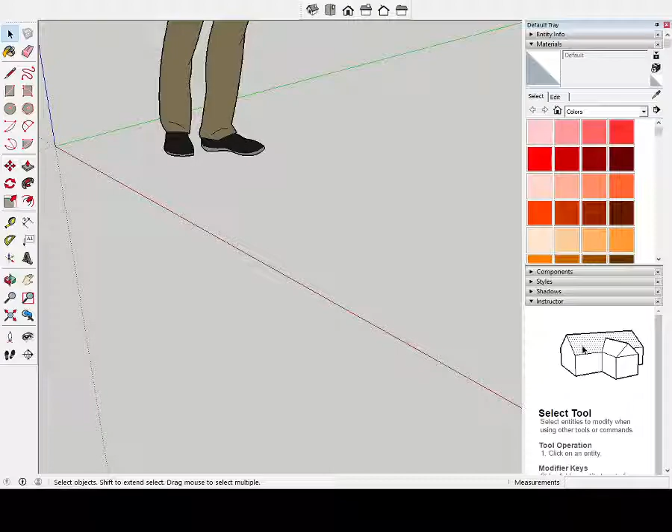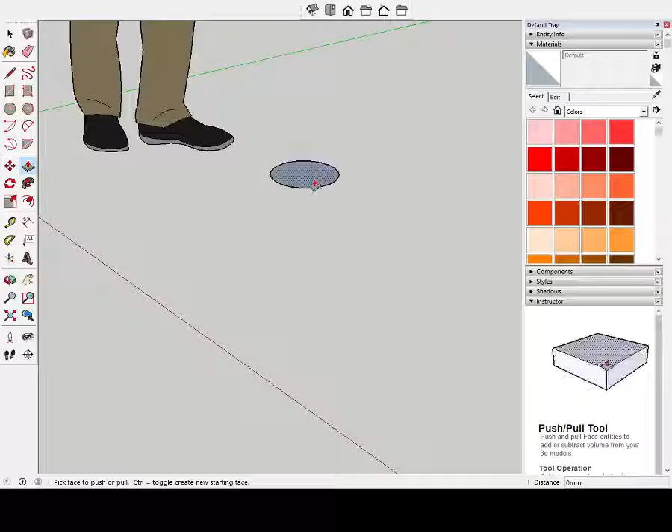What I'm going to do is straight away begin. I'm going to draw out the base, which is going to be 170 diameter, so I'll make this a radius of 85. Then I'm going to bring it up with the push-pull by 30.

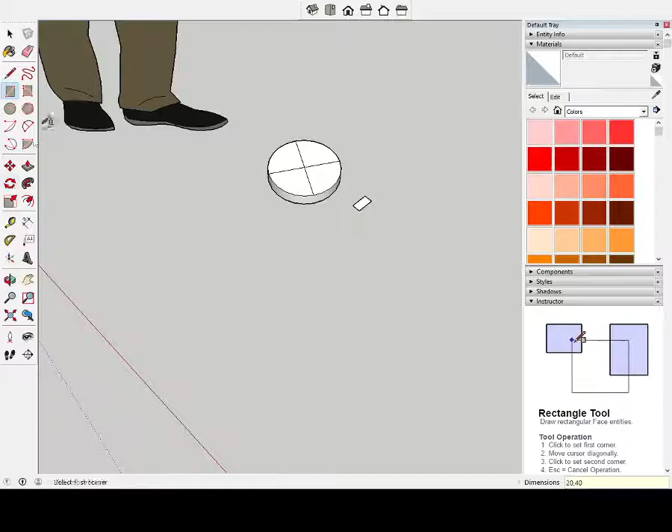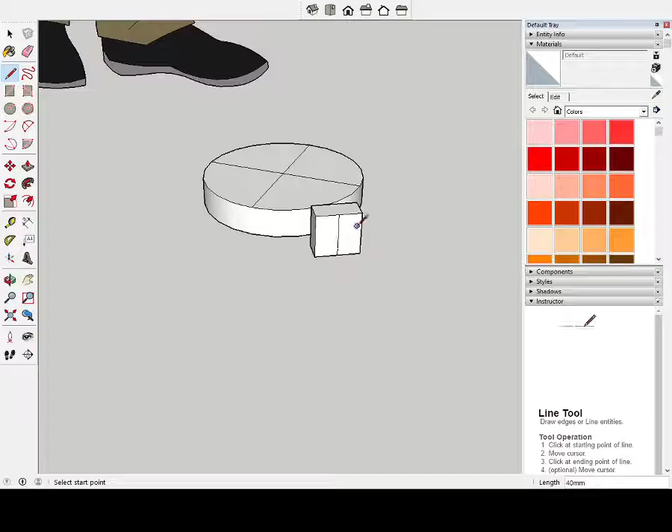What I'm going to do is look at this from above and draw a line across to find a center. Now I'm going to draw out a little pivot point, which I'll make 20 by 40, and push-pull this up to the same amount, so I'll push-pull it up by 40. What I'm going to do with this now is put a hole in it, find a center, divide it up center by center, and put a little hole in.

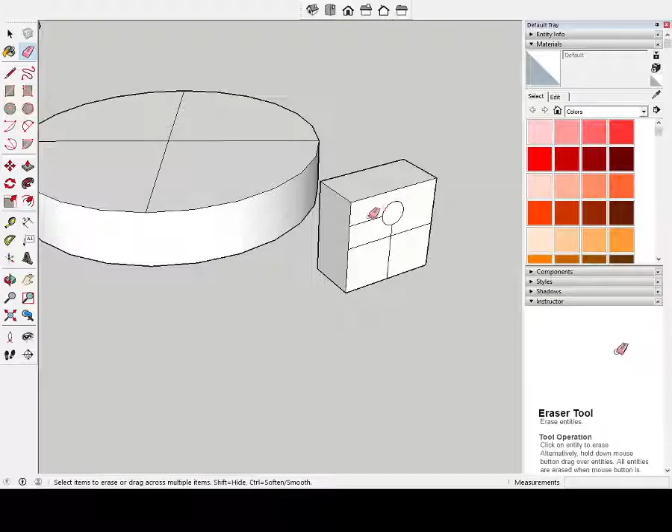The hole is going to be a radius of 5. I'm just going to rub these bits away. Now you can add curved edges to this, but I'm just going to keep everything square and simple. Push-pull this away.

Right, great. I'm going to be using this in a variety of ways. The first thing I'm going to do is use the move and control to duplicate. Undo. Select the whole thing before I do that.

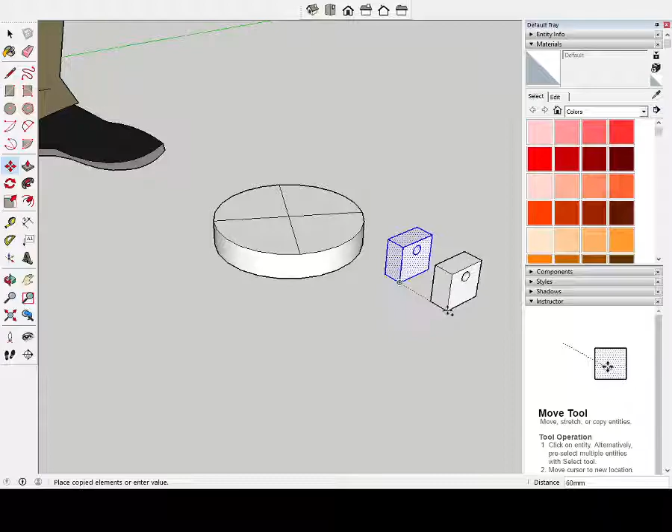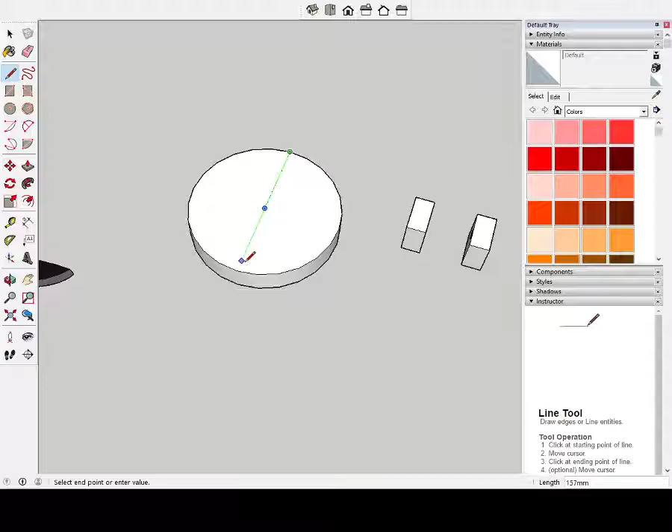I'm going to keep a copy there, this one, and just place it up here. What I want to do is place this on the circle. I think I'll just do my lines again. There we go, that's a bit better. Select one of these, place it above.

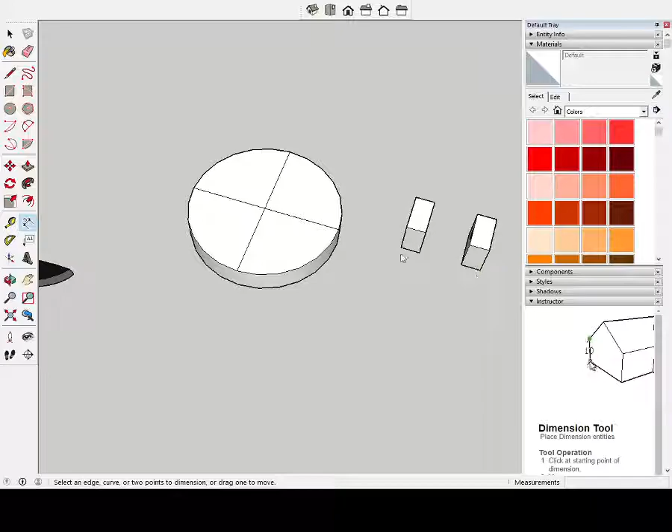Now what I'm going to do is put it exactly on. If I remember correctly, this was 20. So I'm going to do a little offset on this inner line here of 10. That should give me a guideline to stick this to. So I'm going to take the whole thing and pull it over to here and move it along a bit.

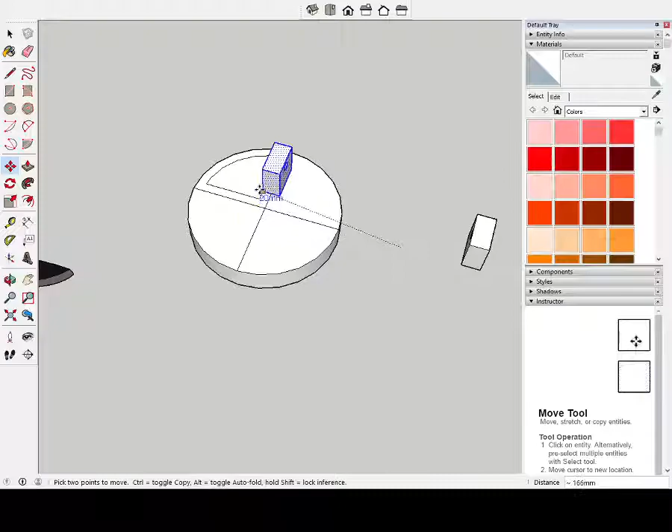Actually, if I want to be really precise, I can draw along here 20. That's what I'm doing. There's my endpoint, and I'm just going to draw a line across. It'll rub out all of these other lines—I don't need any of these. This is just to help me place this into the correct place.

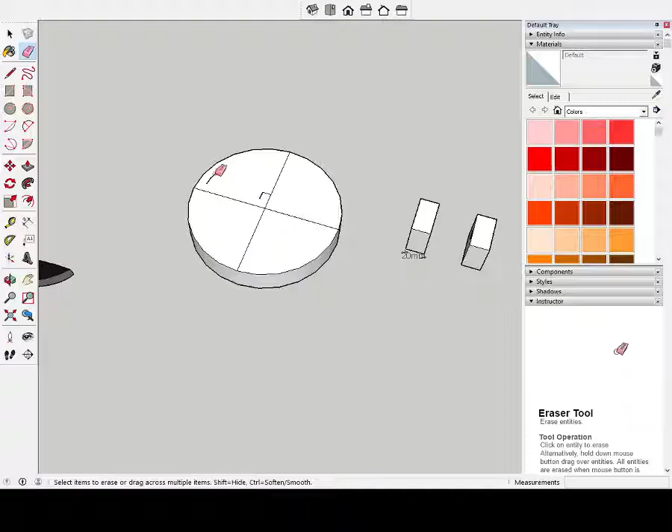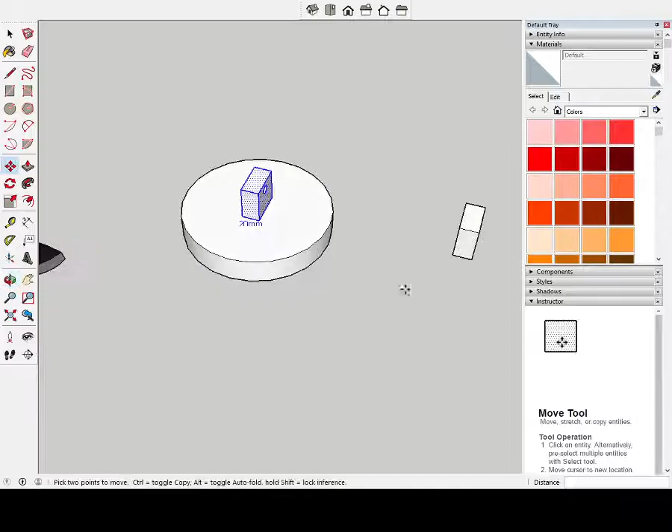So that's centering it basically. I've used the offset and then a measured line. I'm going to grab it from this corner because that's the corner I wanted to go into. I'm going to turn this around a bit. There we go, so that's now centered. I can rub out my measurement, just deselecting bits I don't need anymore. Select the measurement—that's kind of hidden in the block, so I'm just going to leave that there.

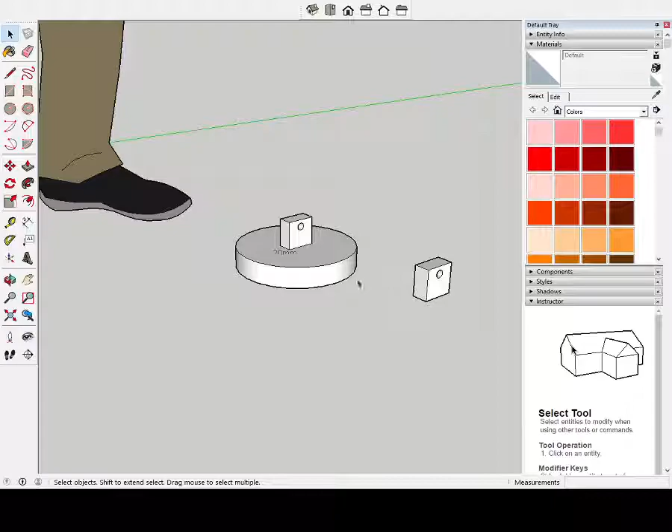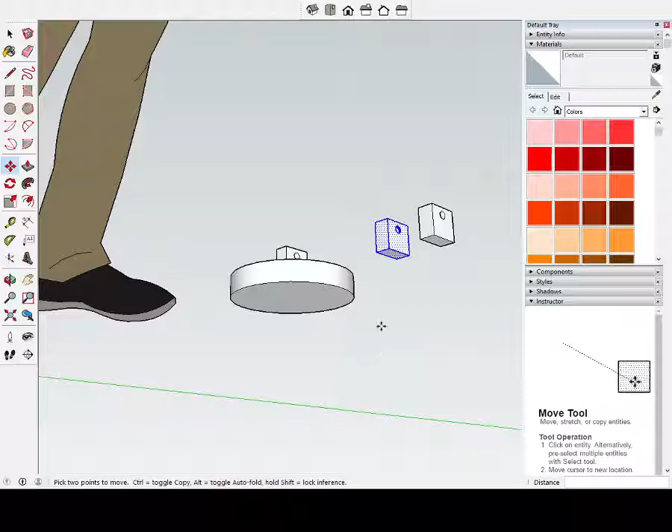Okay, so this is my base. What I'm going to do next is copy this again by moving it, using the control, and I'm selecting the entire block when I do this. What I'm going to do next is make this, looking at my measurements, just 400. So I'm going to add on—this is actually a height, I believe, of 40. Just double check that by putting a measurement on.

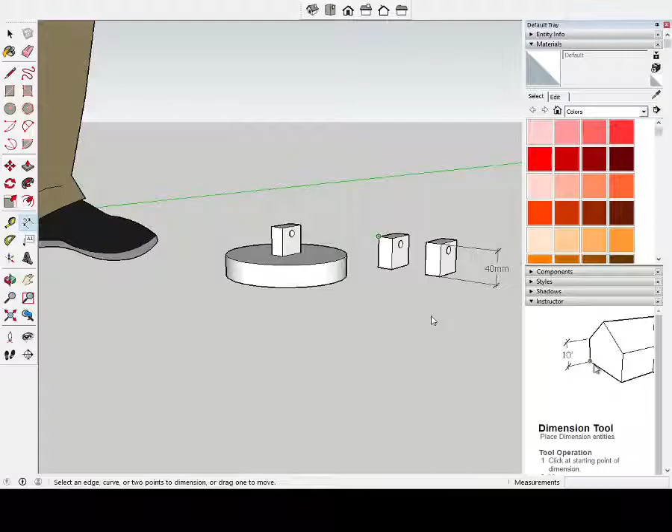Yeah, so I'm going to make this—I'm going to add on an extra, what I'm going to do first is add on an extra 320, and then add on a block at the bottom, and duplicate this. So what I'm going to do is push-pull this below the work plane, and push-pull it down 320.

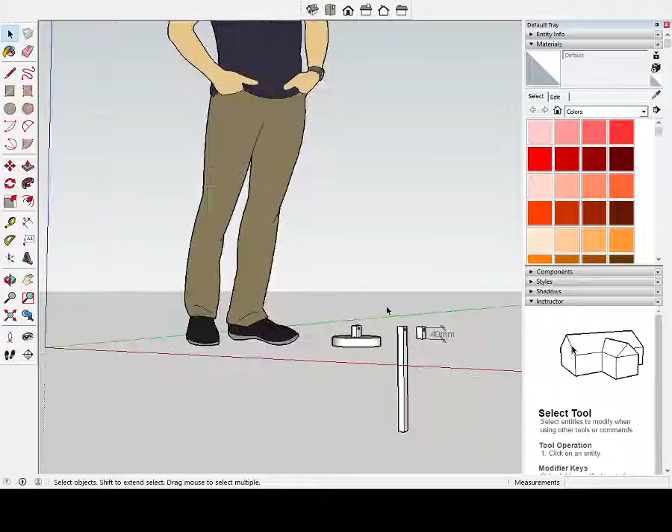Great. And then what I'm going to do is just grab the whole thing and bring it up to the normal work plane, because I'm now below the work plane, underwater so to speak. Use this tool, bring it up. That's fine, doesn't matter if it's floating in the air a bit.

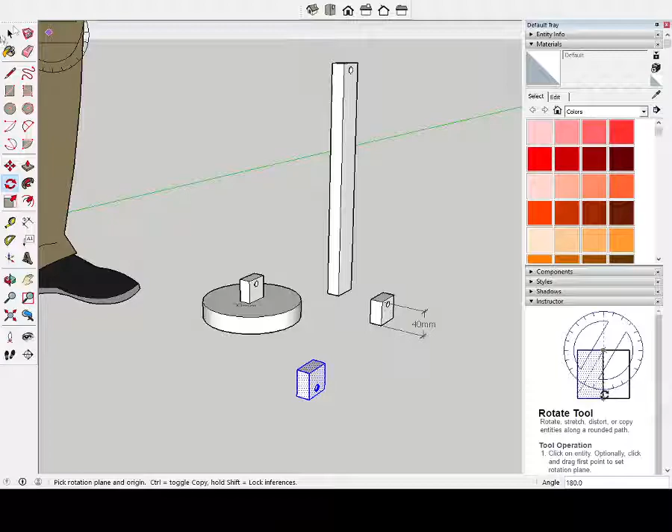Then what I'm going to do is take this again, I'm going to move it, using Control Shift to duplicate it. What I'm going to do with this other block now is rotate this using the red, I'm going to rotate that 180.

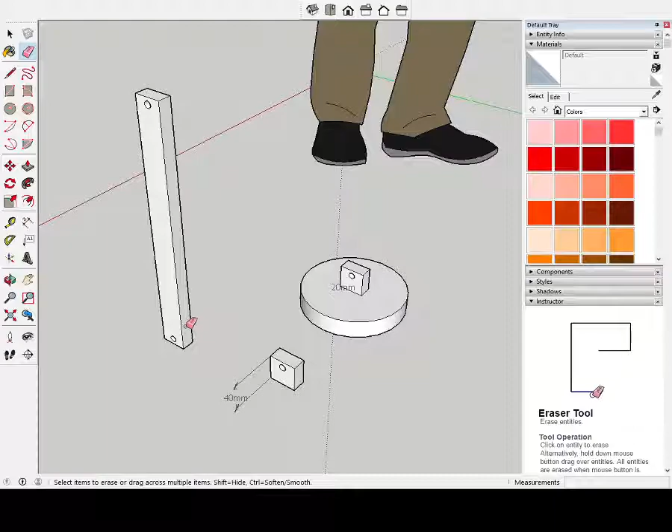And then what I'm going to do is select this and join it together with this, like that. Now I could do a variety of things. What I think I'll try doing here is just getting rid of that join line, and let's see what happens. Yes, that's now one piece. So that's going to be my arm, or the first part of my arm, and I'm just going to make this into a component by right clicking on it, and that's okay.

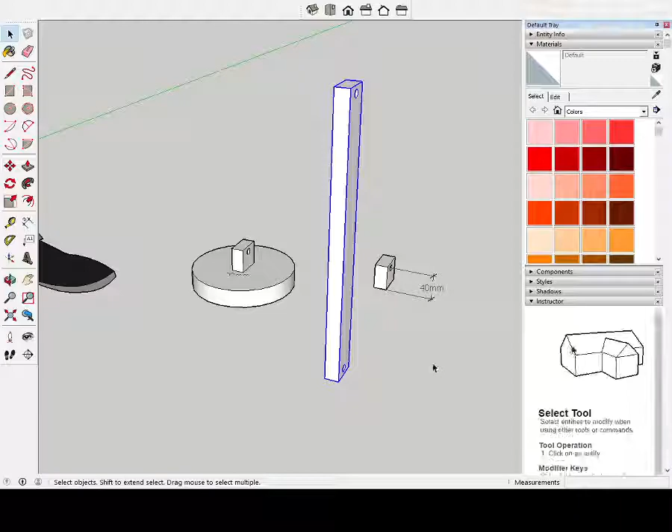So what I'm going to do is now place this hole over hole, if that makes sense, so it sort of matches up. I'm going to move this using this hole here and just join it to that one there. Maybe it's easier actually if I try doing this from the other side. Alright, let's have a look. Okay.

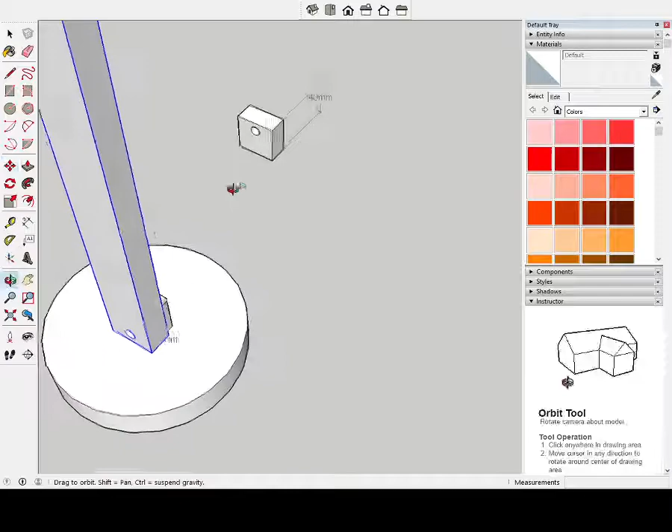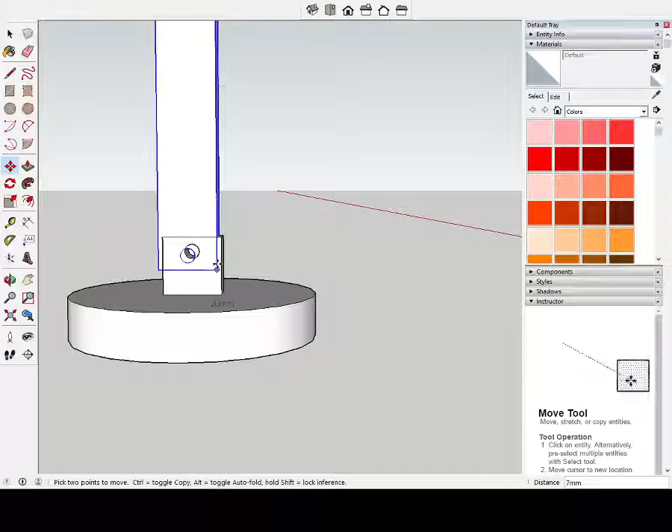Right, let's have a look. You can kind of just about join it up. I think possibly there's a better way of doing this, but I'm just going to do it quickly like this. There we go, that's actually matched up. Okay, that's fine.

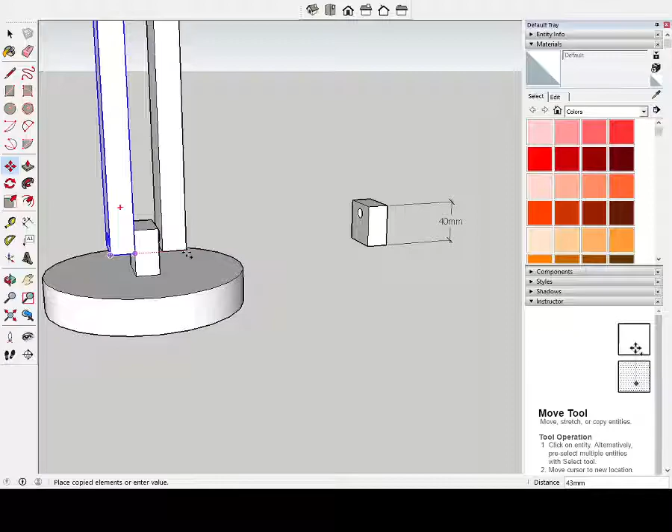What I'm going to do now with the component is draw it directly that way. Since this is a component, I'm going to press Control and duplicate it to the other side. And so long as I stay on that red line, I should be okay. That's pretty much edge to edge.

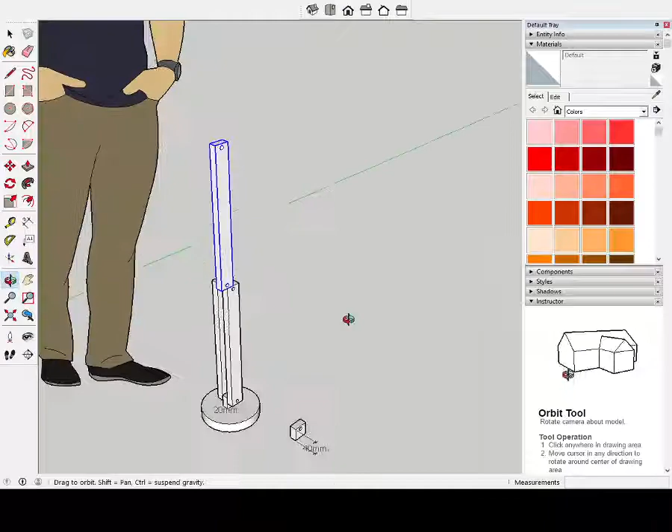So that's my arms. Now, using the Shift and Rollerball button, I'm going to duplicate this again using Control, and place that in the middle of these two. So it's a bit of maneuvering around - you might undo that, I duplicated it by mistake.

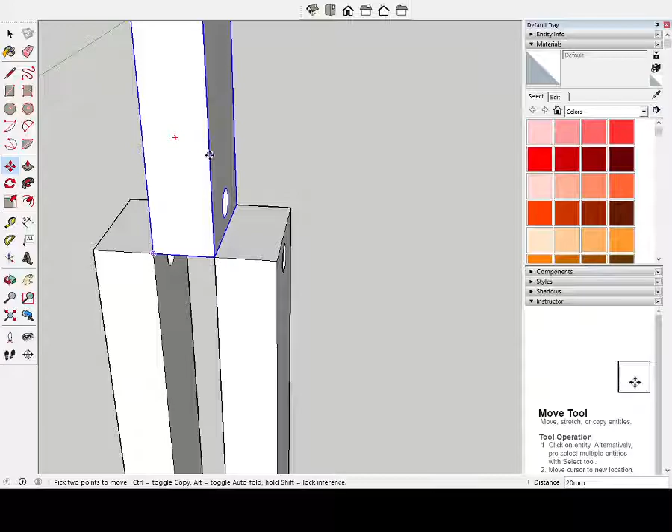It's a bit of moving around. You might want to set up a few lines as guidelines to connect things. I'm actually just going to use the axis as a way of drawing things down. So let's see if we look through - I need to draw this up a little bit more. Yeah, perfect.

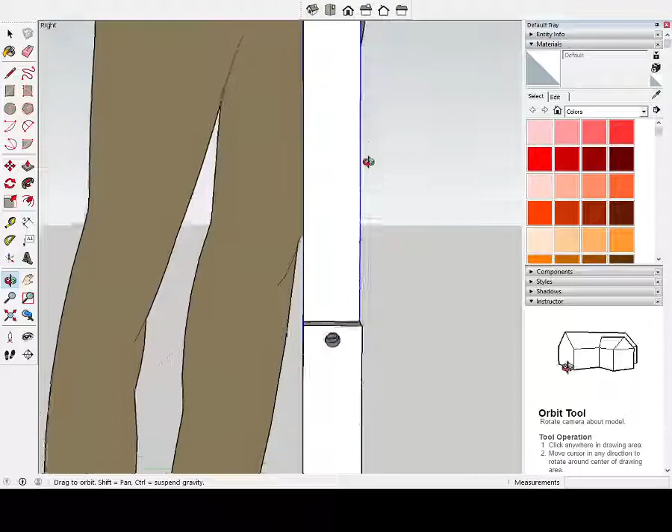Alright, what you can do afterwards, since this is just standing straight up, you can take this and rotate it. I'm going to actually rotate this - hopefully this works - along the red axis, and rotate it this way. Yeah, we're coming out of that, that's okay, we'll work that back in again.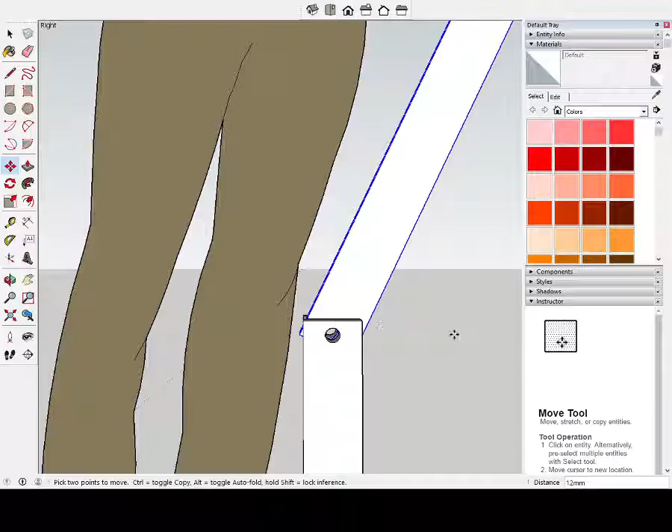Select it, move it back down a bit, move it down and across, just match up again. Alright, that's fine, so we've got most of these parts. This piece I'm going to use one more time.

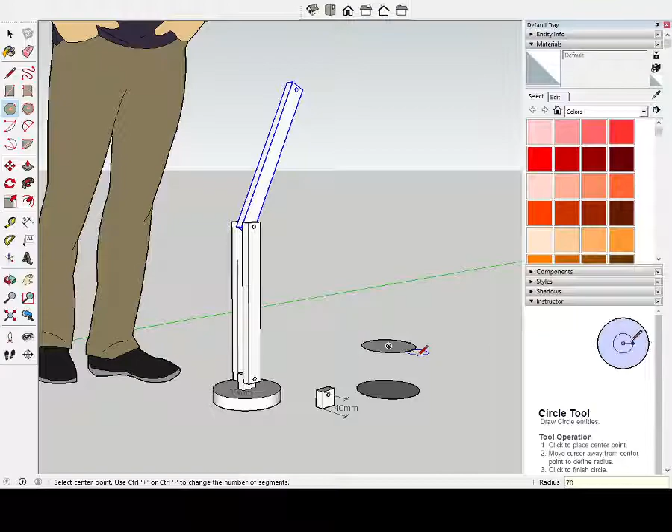What I'm going to do first is create a very simple lampshade, with a radius of - let me see what my measurements are. I've got some basic measurements. Once again, I think that measurement was 85, so I'll make it 70 actually. 70 radius - oh, undo, hit the wrong button there, folks.

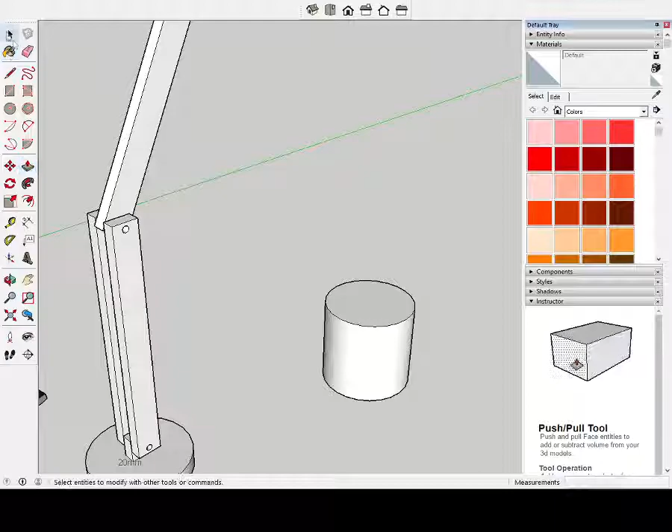Okay, that's fine, just get rid of this other one. What I'm going to do is push pull this up. What's the height of it? It's about 140 again, so I'll do 140. Then I'm going to grab the whole shape and use the scale, and just push it across.

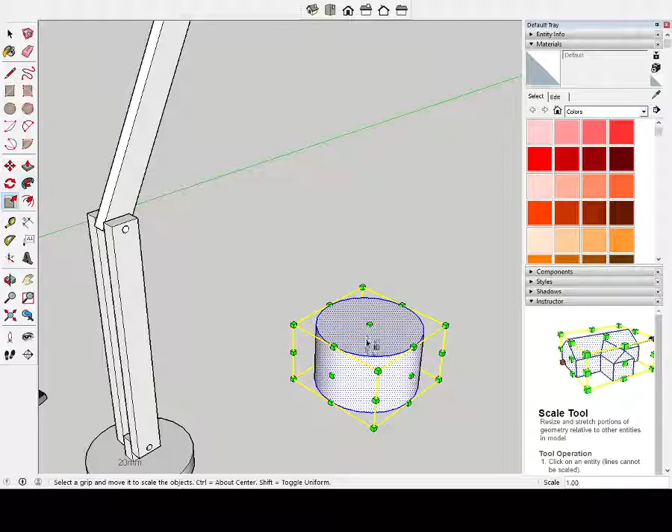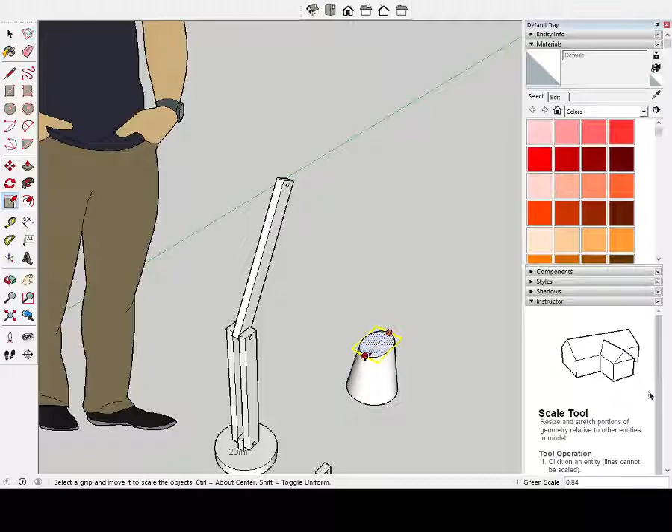Just trying to taper it actually. Let's just take the top bit and see if we can scale that. Good, yeah, that's what I wanted to do. You can do this by exact amounts - I'm not going to bother, I'm just doing this for the purposes of illustration.

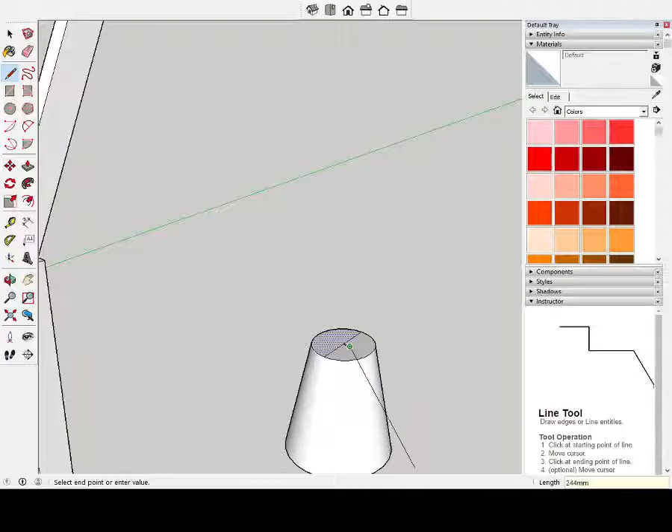Once again, just to center this to the top, I'm going to draw a couple of guidelines. I'm going to go out from the center at 10, and use that as a guideline there. And I'm going to put my little pivot point on top. I'll just make that a component so it's easier to move around. Create - okay, so let's move that up.

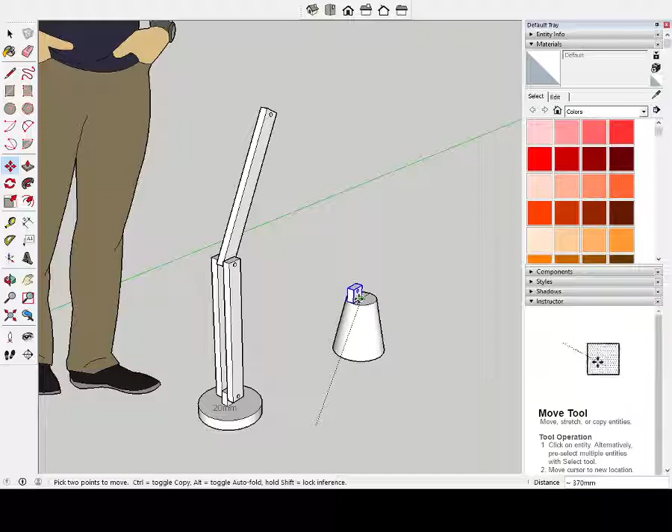When you make things components as well, what happens is they don't actually distort the object you're placing them on top of. There we go, so that's fine. This is very basic, just to get you started - make the whole thing a component. Create. Good, alright, now let's move this into place.

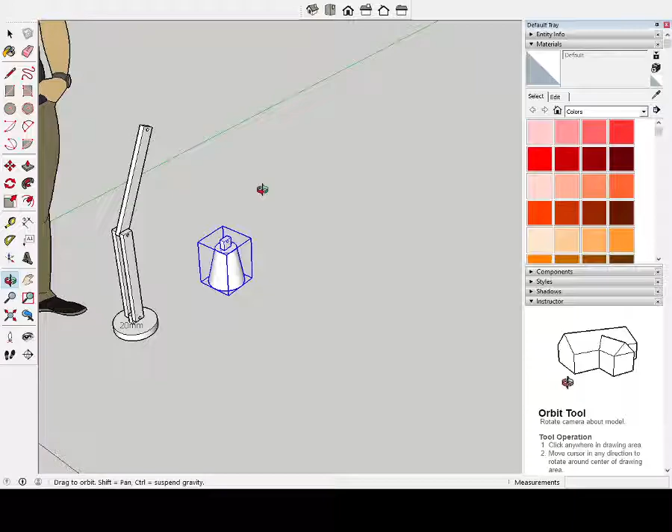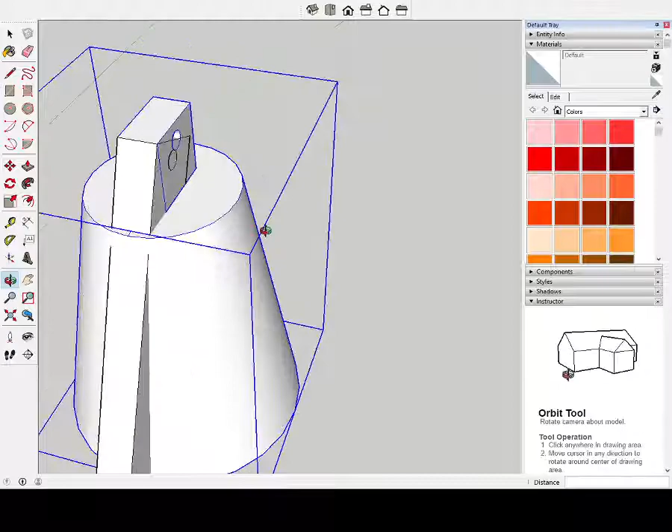Okay, now the top bit - there's a bit of a problem here because the top bit's only got one piece, but that's okay, we could just imagine there's a screw going through from the side. So I'm just going to move this up from there to there roughly, and we'll move it across. Alright, good, we'll just get those holes to match up, so we just need to look at it from the right direction.

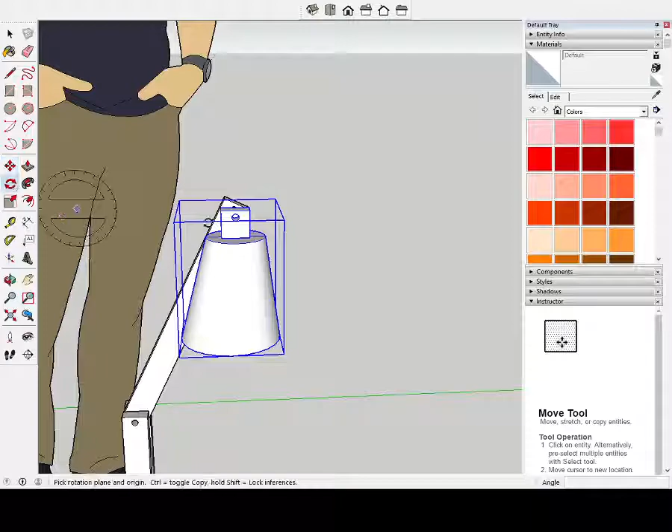Right, okay, I'm going to rotate this as well. I'm going to have to rotate on a flat side - I'm going to use that side and rotate it. Okay, just so that there's enough space between the actual arm and that point.

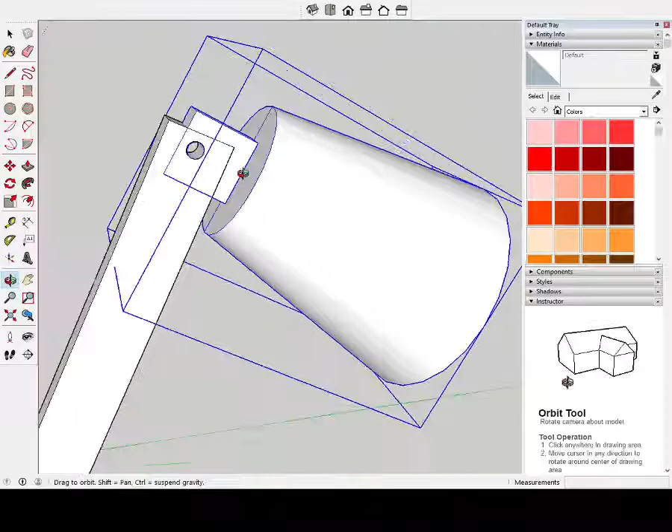And that - I could put in cylinder-shaped bolts to show that this is bolted in and to hold things in position. But I just wanted to very quickly show you how to do an Anglepoise lamp.

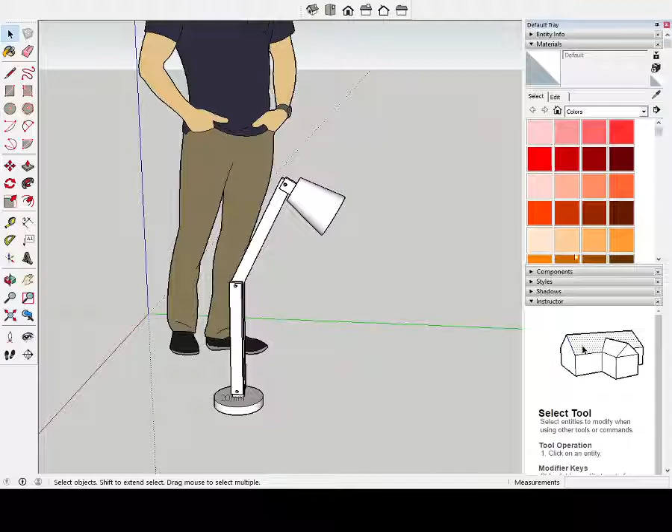You can add also textures and colors - I'm going to do that. I'm going to add wood for the base just to make it look pretty. I'm going to add metal for the arms. Yeah, okay, and also what I'm going to do lastly is just add a bit of color for the lamp, maybe a nice yellow.

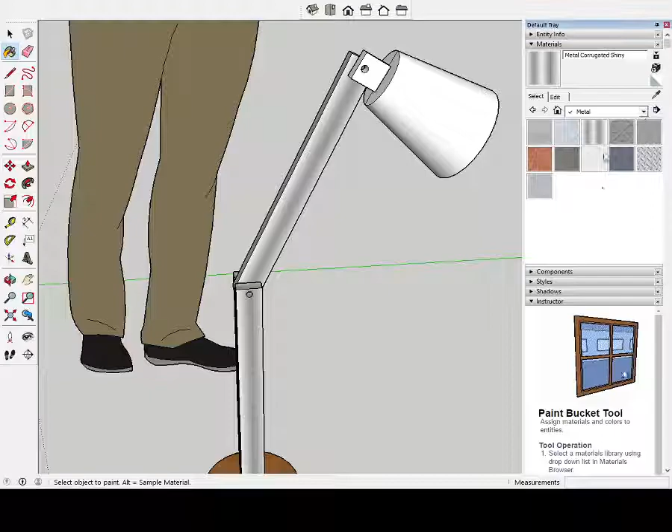Alright, maybe an orange - yeah, it's a bit more harmonious. This could be hollowed out as well, but that's a basic example of how to do an Anglepoise lamp in SketchUp.